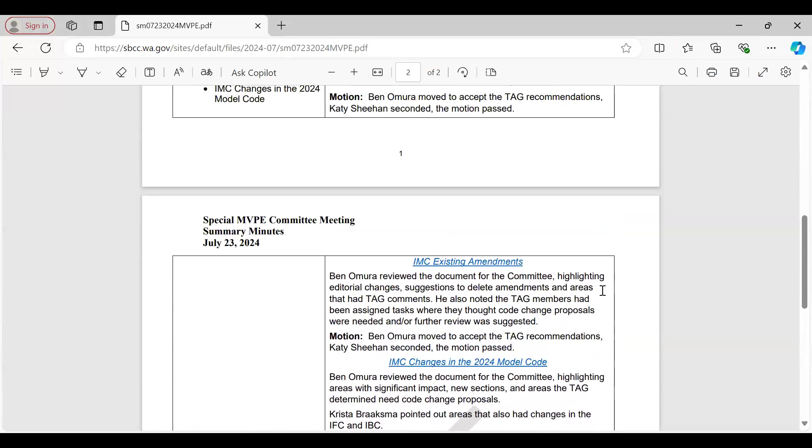Jay, I think your audio's a little bit breaking up. There we go, that might help. Okay, thank you. I'm going to try with video off and see if that helps. I will also shift to a phone connection on my audio.

Okay, is there any public comment on the minutes? Hearing none, could I get a motion to approve the 2 sets of minutes on our agenda? So moved. Second. Is there any discussion? All in favor? Aye. Aye. Aye. Any opposed? Okay, the minutes are approved.

Next on our agenda is a number of opinion requests from Bellevue, DuPont, and King County. We'll start with the mechanical code. Krista, can we start to walk through these individual changes, or individual interpretations? Thank you.

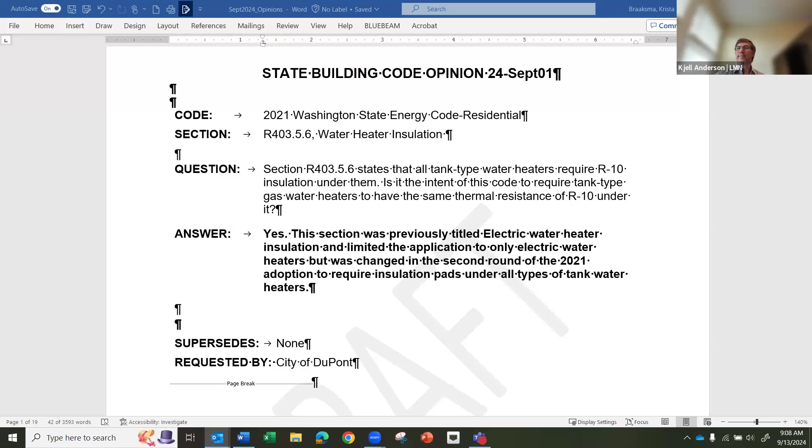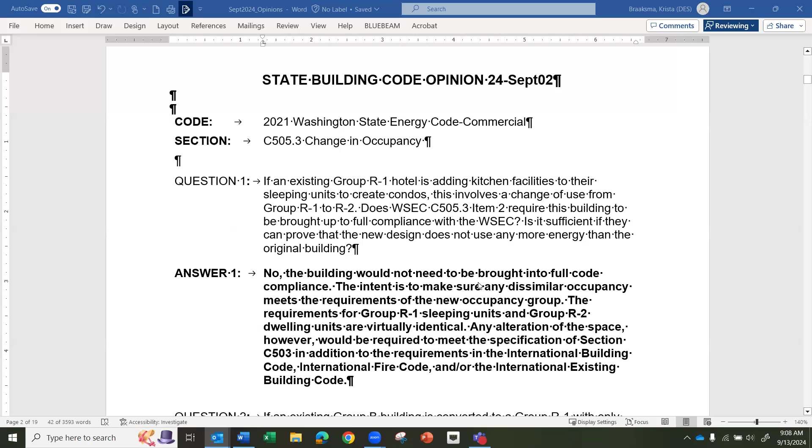Next, September 02, this is regarding changes in occupancy from the City of Bellevue. The first question is, if an existing group R1 hotel is adding kitchen facilities to their sleeping units to create condos, this involves a change of use from group R1 to R2. Does WSEC section 505.3 item 2 require this building to be brought up to full compliance with the Washington State Energy Code? Is it sufficient if they can prove that the new design does not use any more energy than the original building? The proposed answer is no, the building would not need to be brought into full code compliance.

The intent is to make sure any dissimilar occupancies meet the requirements of the new occupancy group. The requirements for group R1 sleeping units and group R2 dwelling units are virtually identical. Any alteration of the space, however, would be required to meet the specifications of section C503, in addition to the requirements in the International Building Code, International Fire Code, and/or International Existing Building Code.

The second part is, if an existing Group B building is converted to a Group R1 with only sleeping units, but no dwelling units, what are the energy code requirements? This scenario does not appear to be addressed in C505.3. The proposed answer is the conversion would fall under item 2 of section C505.3 and would be required to be brought into full compliance with the code.

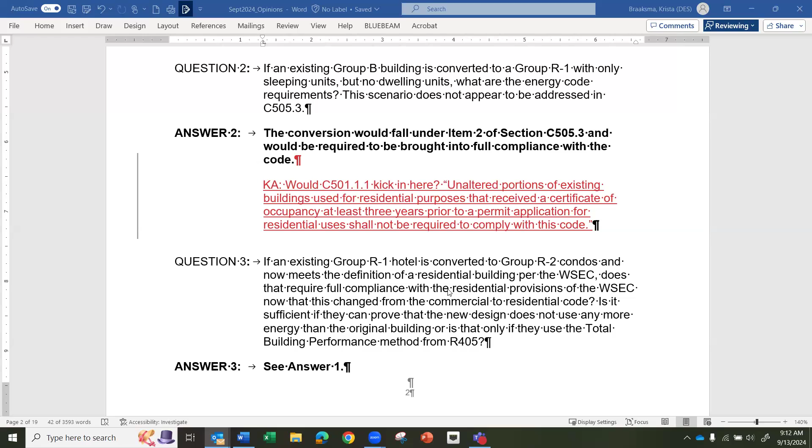Question 3: if an existing Group R1 hotel is converted to Group R2 condos and now meets the definition of a residential building per the Washington State Energy Code, does that require full compliance with the residential provisions of the Energy Code now that it's changed from commercial to residential? Is it sufficient that they can prove that the new design does not use any more energy than the original building, or is that only if they use the total building performance method from R405? And I reference back to answer 1, which says that they would not need to bring the building into full compliance.

Okay, Kjell, you had some comments. Yes, and I was trying to look it up - I thought that there was a law that passed that told us to put 501.1.1 in the code. Is that, am I remembering correctly?

You are, I remember a discussion that we had, and I will look up. I was trying to figure out, the law said a specific thing, and I thought the intent of the law was to allow conversions to Group R from something to Group R without requiring certain other things to happen. So that's why I made this comment, but I wasn't able to find the actual law that said that.

It's House Bill 1042. Okay, let's see here. And my recollection is the same as yours, that the whole purpose of this bill is conversion of commercial space to residential.

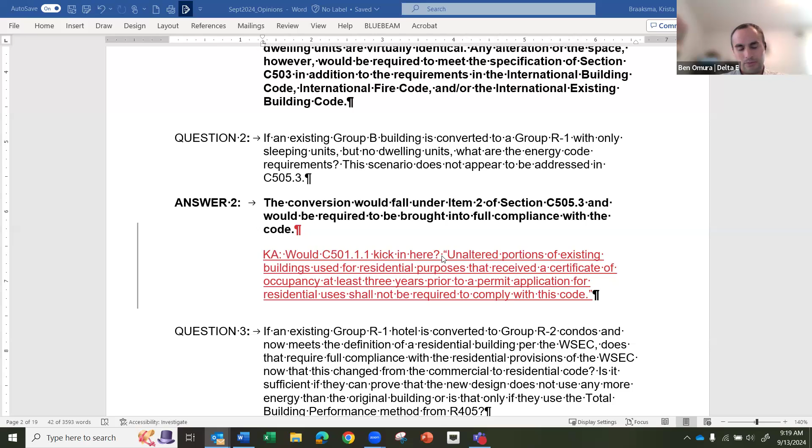And the point I was going to make is also, if we were going to reference 501.1.1, would we also need to do it in the answer to question 1 as well, since those are adding dwelling units.

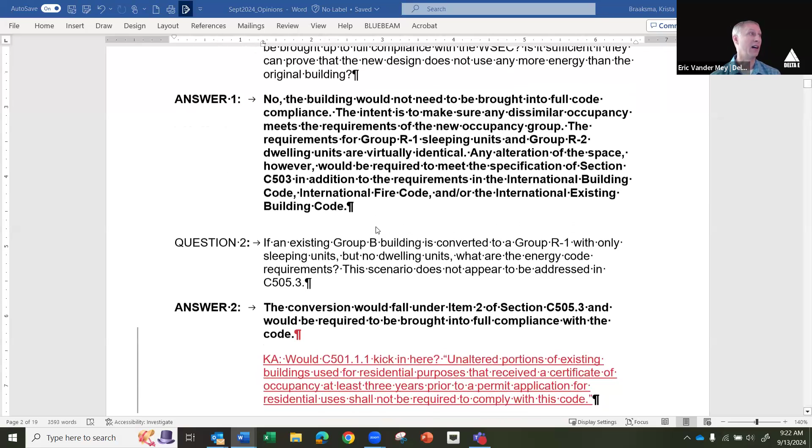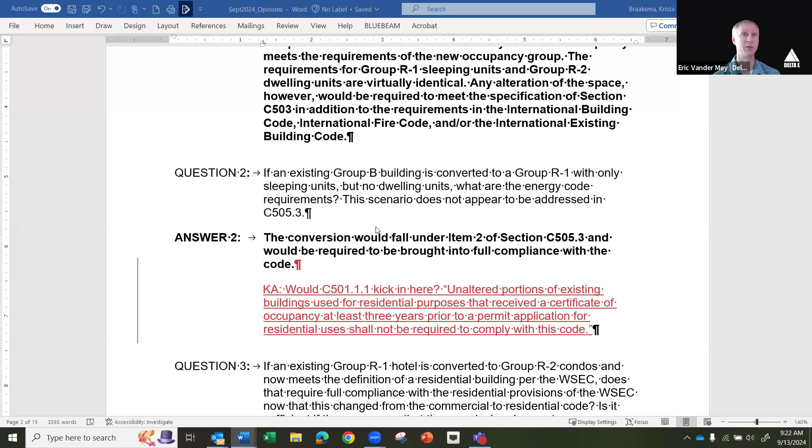And then, yeah, I agree with Ben's comment earlier that we did clarify in section 501.1.1 that the unaltered portions of existing buildings do not have to comply with that. So it's not the whole building that has to comply, it's just whatever's converted to a dwelling unit or whatnot, so it's the altered portion.

I know there's a lot of occupancies out there wanting to convert to group R2 dwelling units, and this is definitely a part of the code that needs additional work, whether it's a group B conversion or a group R sleeping-to-dwelling-unit conversion. There could definitely be language added that alternate means and methods can be approved by the code official. But we have to be careful how we answer that, and maybe very strategic about it, or we need to go into emergency rulemaking to modify the code, because we need ways to create affordable housing in the state.

To that point, Eric, I've always, whenever it says 'shall be brought into full compliance with this code,' that's always struck me as an odd thing to say, because if in one code section you're saying it's full compliance with the code, and an adjacent code section says you don't have to alter anything that is not altered, isn't that full compliance with the code?

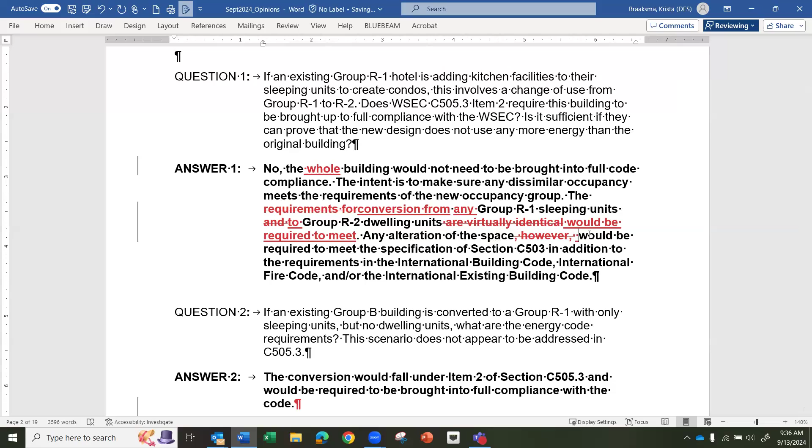Yeah, I think lobby spaces, corridors, the pool, those things are not dwelling units or sleeping units. But the exterior envelope would be. Presumably, yeah, okay.

Eric, go ahead. Just as a point of reference, I did a little code digging. It looks like up until the 2009 Washington State Energy Code, any space that was converted to any group R occupancy had to be brought into full compliance. And then in 2012, that was limited to just dwelling units. So the trigger changed in the 2012 code to be limited to conversion to group R dwelling units, just as some history.

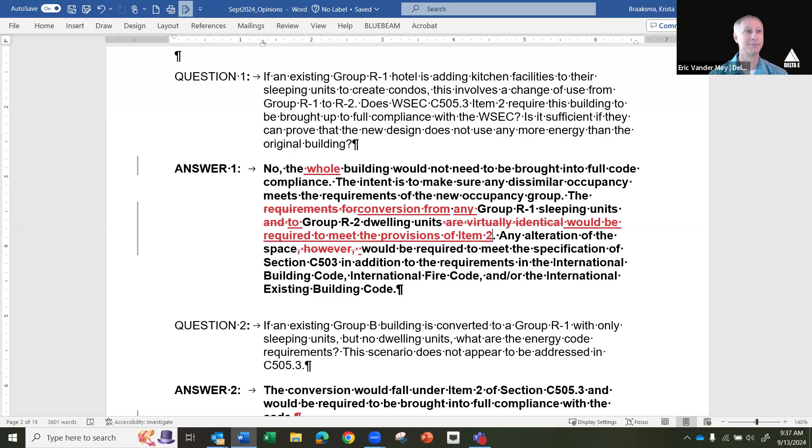Okay, given our discussion, Krista has made some potential changes to answer number 1. Does that get to clarification of what we're talking about? I think the provision of item 2 would need to be the provision of maybe C503, C505.3 item 2.

Okay, Jonathan, go ahead. The residential code provision says that any existing building, due to a change of use, must be brought into full compliance with the residential energy code. It's stated in chapter 5 of the residential energy code. I guess that's a good point, we could also add the residential energy code into the answer, because it's possible, per a previous comment, that a Woody walk-up hotel would be a Woody walk-up residential conversion. I think that's what question 3 is addressing, my understanding.

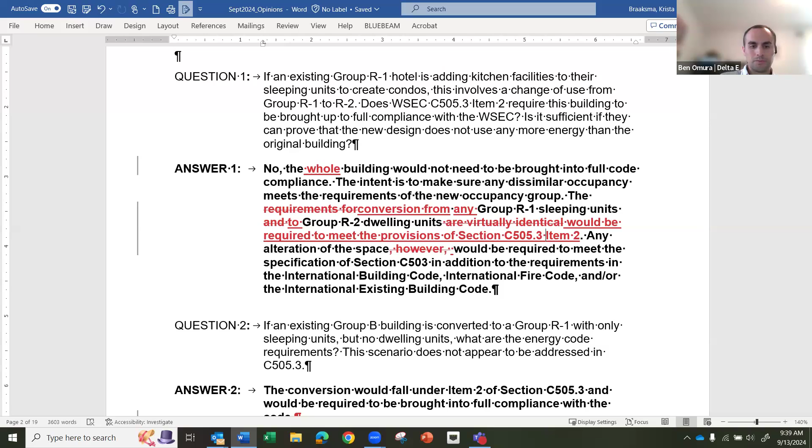Yeah, and I guess the question is specifically about group R1 hotel, which is not under the residential energy code, right. Okay, then let's break these up, question 1 and answer 1 on the hotel conversion.

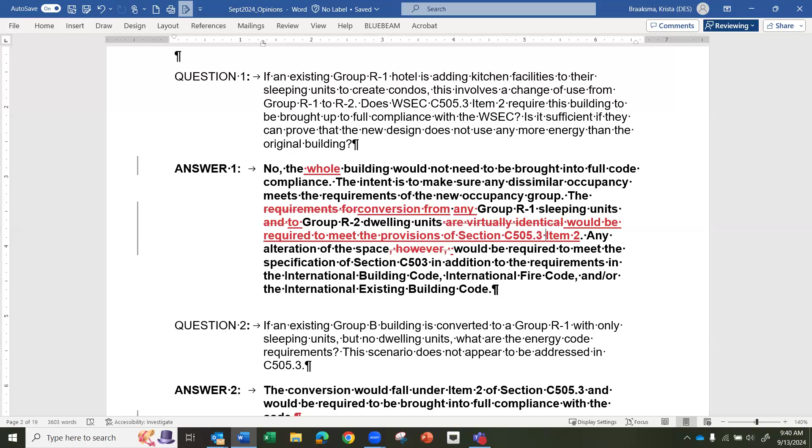Does the language shown on screen help clarify things, and are committee members comfortable with this? Nate, does this answer your submitted question? Yes, just so I clarify, it looks like you're saying that any portion of the building converted to an R2 still needs to meet the full energy requirements. And so if a portion of that dwelling unit is exterior wall, then that exterior wall would need to be upgraded. All the mechanical systems for that space would need to be upgraded. And that's what you're saying, which is pretty much in line with how we've been interpreting the code, which is fine.

Okay. Any further comment on answer and question 1? Okay, let's go down to 2 and 3, because it seems like we brought up some additional issues here.

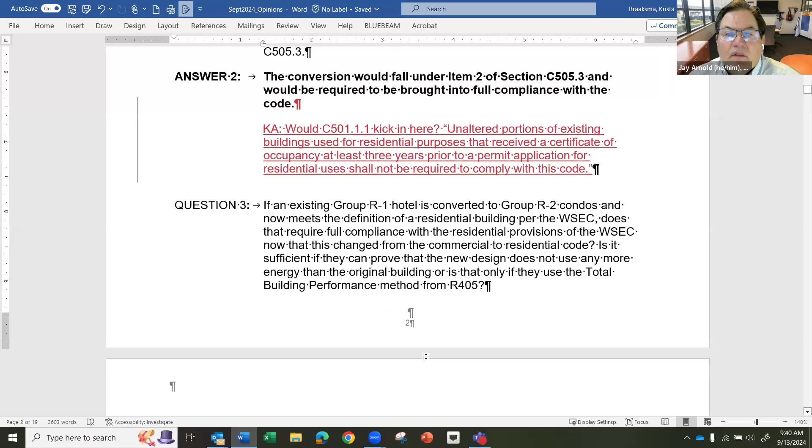For question 2, how do we want to handle the C501.1.1? I know Kjell had looked at this ahead of time. We're bringing this legislation in kind of at the last minute. Are folks comfortable with putting together an answer here, or do you need more information?

So I guess my question is, this seems to be a mistaken oversight in the code because it only talks about group R2 dwelling units. So the response says it falls under item 2, but item 2 doesn't say anything about sleeping units. So if I convert anything to a sleeping unit, I would say the code says item 2 does not apply to sleeping units, only dwelling units. So converting to a hotel appears to not be covered, which maybe that's just a clarification, but that's what the code, I think, actually says.

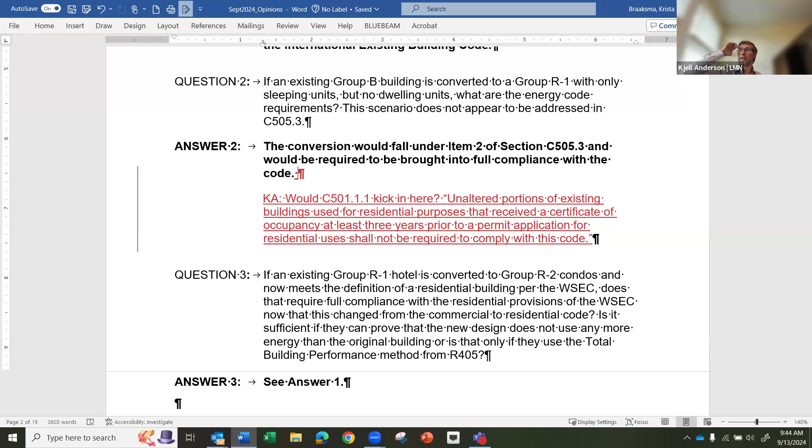The answer would be no. The conversion would not fall under item 2 of section C505.3. Other code requirements might apply, but it would not require full compliance.

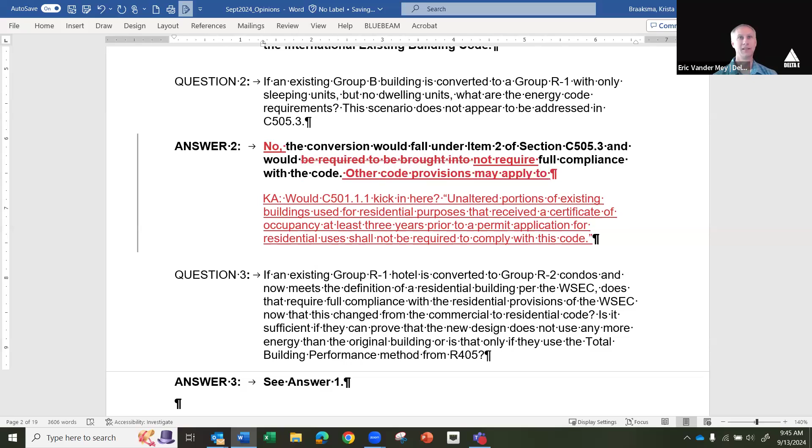One thing I'd like to... Go ahead, Eric and Kjell, didn't mean to cut you off. Yeah, any systems that are added would, yeah. Okay.

As we're discussing here, a change of opinion compared to the first answer where we clarified it, I would like staff to weigh in on how they got to the original answer before we're looking at changing the answer. Krista, do you have any comment?

Well, I was kind of going back to the intent of the original code before we mashed it in with the IECC, and when it was just talking about conversion to group R occupancy and not specifying group R1 versus R2. So I was basically going off of more historical precedents than how the code reads now. Thank you.

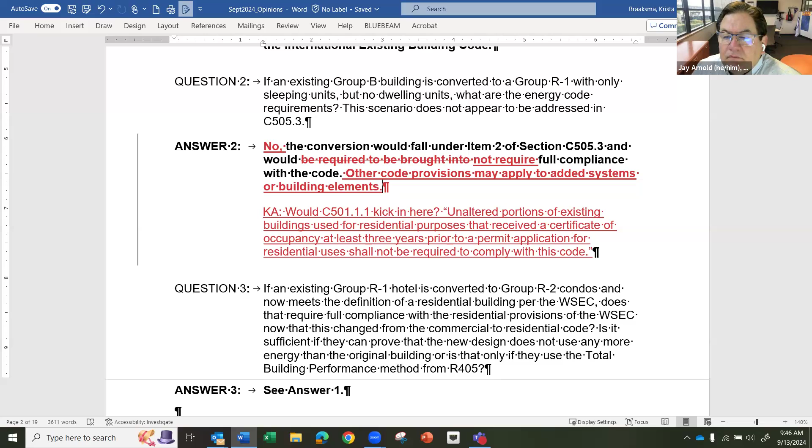Is there any comment on the draft that is on screen? I think my one comment is that I get how the code reads, but my whole point is it seems very weird to regulate a hotel to a condo more restrictively than you regulate an office to a hotel. So I guess that's maybe future code thought, but the way it was previously written seemed to go back to the assumption before 2012, as Eric sent in, when it seemed to be more clear, and the addition of dwelling units, in my opinion, confuses this. This is clear, but again, it doesn't actually seem to make sense.

We'll be accepting proposals for the next commercial code cycle in a few months. So if I could summarize your comments, Nate, you're saying this interpretation is clear from a policy point, but we might have some work to do in the future. I agree. Okay, got it.

Is there any further public comments or further comments on question 2 and answer 2? Okay, let's look at question 3.

The staff draft opinion says it's covered in our answer previously. Is everybody comfortable with that?

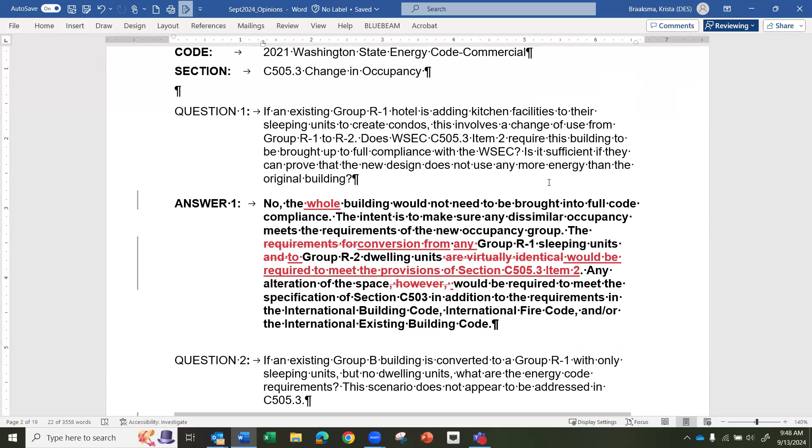You've changed the answer to question 1 to be the more restrictive literal code reading, which means if you reference question 1, I think it's the same thing, like the residential code says full compliance is required. So if that's the stance we're taking, then I think answer 1 is fine for me, but I could see it needing to be clarified and put in some note that full compliance would be required per the residential code.

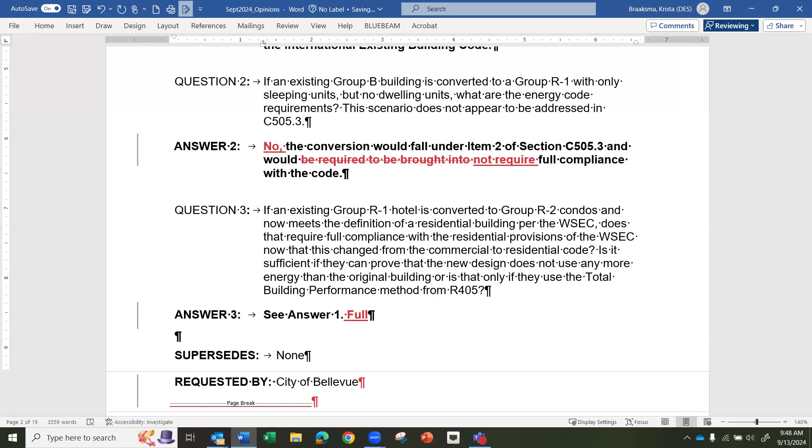Thank you. Ben, go ahead. Yeah, I think it would be helpful to clarify in the answer to reference the relevant residential energy code section, as Jonathan mentioned, as well as potentially clarifying that the assumption for this condition is that the building itself would fall under a residential classification.

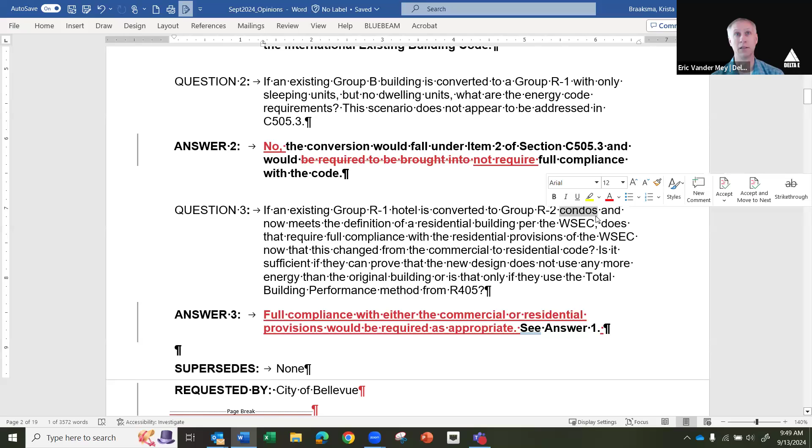Eric, go ahead. Yes, I just want to comment that condo is not a building code term at all. There are no triggers in the building code or energy code for condo, so it may be helpful to clarify the question that the conversion is to a group R2 dwelling unit, just to be consistent with code language, if that was the intent of the question. I'm fine with that modification to my question.

And then, potentially we could have a conversion of a building that was built under the commercial energy code that has exterior entrances and is a low-rise residential building, and then now could comply under the residential sections of the energy code. If it was 3 stories or less with exterior entrance building, it would be going from being a commercial hotel as originally constructed to being under the residential energy code, which would just be a really strange transition. So I don't know if we need to comment on that at all.

This came up because we have this exact situation right now. It's under review for this 3-story hotel that's becoming a residential energy code building.

So that's part of the question: can they show compliance under R405, or do they have to show compliance under which code are you starting to and then going to — that's an interesting question.

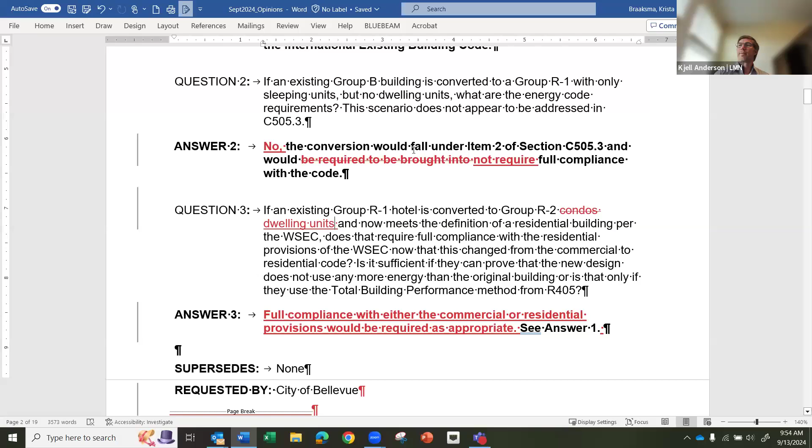Just when we bring a draft for the full council. Okay. Then could I get a motion that we refer this opinion as revised to the full council for approval?

So moved. Second. Okay, it's moved by Justin, seconded by Cho. Any discussion? All in favor, signify by saying aye. Any opposed? The motion passes, and we'll add this to the agenda for our meeting next week.

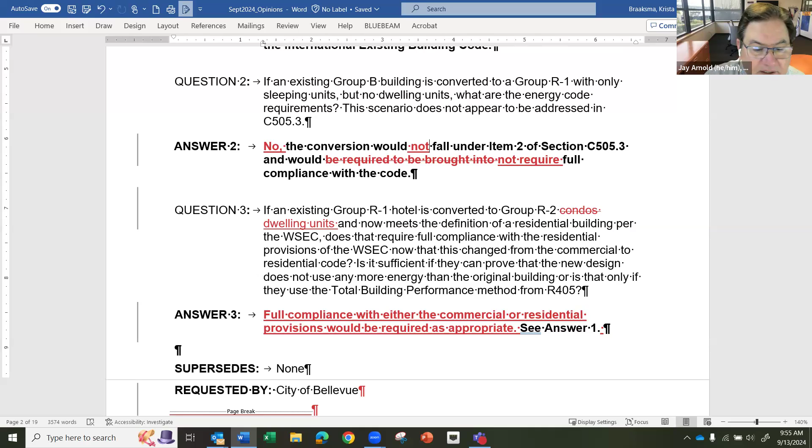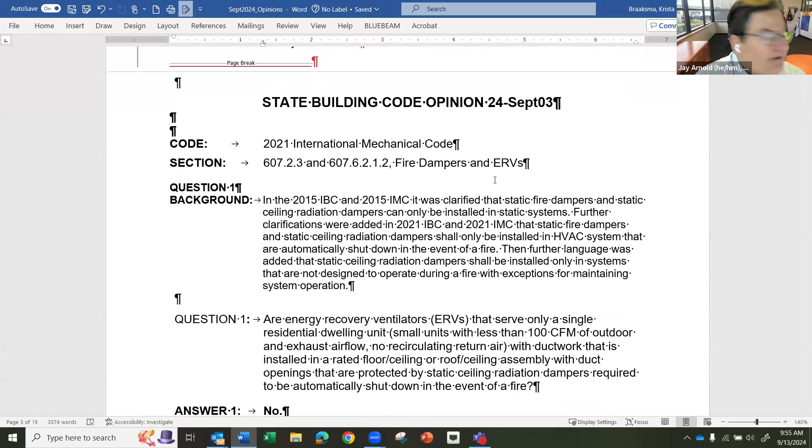Thank you for the discussion, and Nate and others, thank you for jumping in — I'm not seeing raise hand in my Zoom either, so I appreciate the discussion. Next opinion.

Okay, moving on to 03, on the International Mechanical Code. There's background for both of the two individual questions here. In the 2015 IBC and 2015 IMC, it was clarified that static fire dampers and static ceiling radiation dampers can only be installed in static systems.

Further clarifications were added in the 2021 IBC and IMC that static fire dampers and static ceiling radiation dampers shall only be installed in HVAC systems that are automatically shut down in the event of a fire. Further language was added that static ceiling radiation dampers shall be installed only in systems that are not designed to operate during a fire, with exceptions for maintaining system operations.

Are energy recovery ventilators that serve only a single residential dwelling unit, less than 100 CFM of outdoor and exhaust airflow with no recirculating return air, with ductwork installed in a rated floor ceiling assembly or roof ceiling assembly with duct openings protected by static ceiling radiation dampers required to be automatically shut down in the event of a fire — the draft answer is no, with no supporting information.

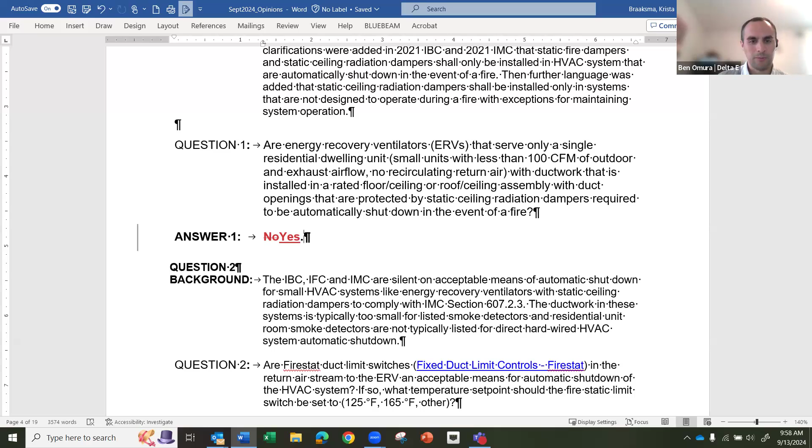Yeah, Ben, and I can find that language. It's either in 90 or 101 of the International Fire Code. So I will see if I can come up with that and get that to Krista.

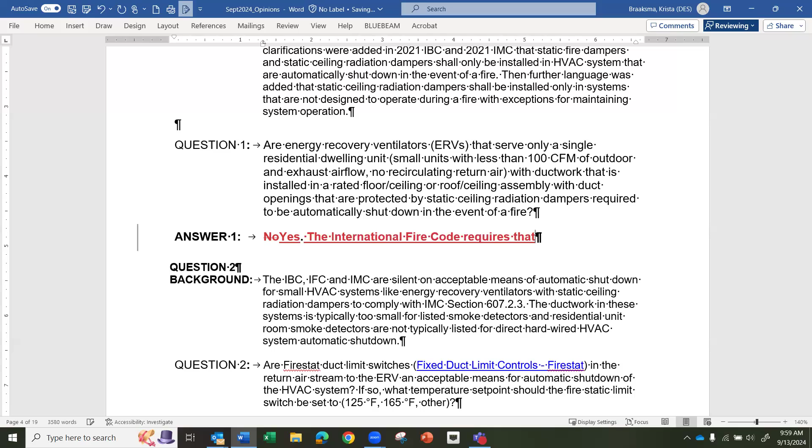Okay, and then for this, would we get the details in time for the meeting next week, if possible? Justin, is that something you can assist with? Yeah, absolutely. I'm actually going to be doing fire damper training with fire marshals on Tuesday and Wednesday, and I'll probably be speaking about the exact code, so I won't have any problem finding it. I'll email the code over to Krista probably Monday or Tuesday.

And any comment on question 2 and answer 2? Eric, go ahead. Yeah, so I guess if the International Fire Code does specifically address the shutdown requirements, then we might need to modify question 2 or modify the answer to it. I haven't found a reference yet in the fire code that specifically addresses these types of systems.

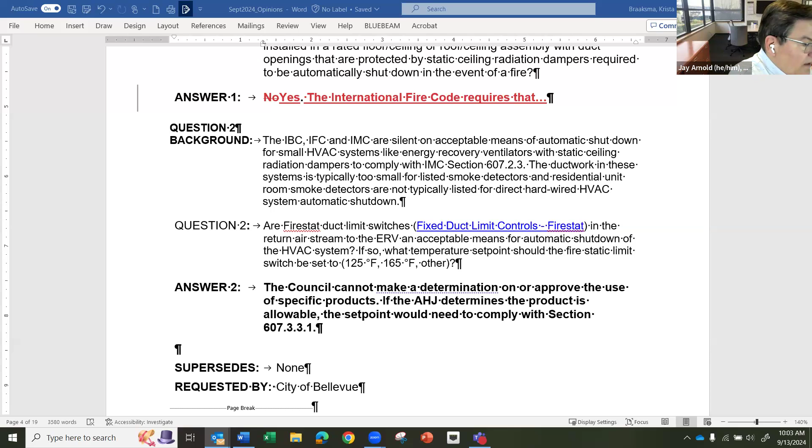Any discussion? All in favor, signify by saying aye. Aye. Aye. Any opposed? Okay, motion passes. Next.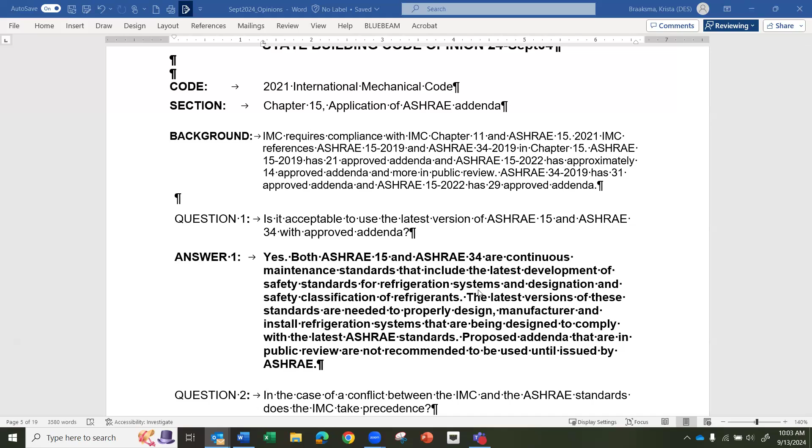Okay. The next concerns the mechanical code and how you apply standards that typically come out after the code is published. And the question is: is it acceptable to use the latest version of ASHRAE 15 and ASHRAE 34 with approved addenda?

The proposed answer is yes. Both ASHRAE 15 and ASHRAE 34 are continuous maintenance standards that include the latest development of safety standards for refrigeration systems and designation and safety classifications of refrigerants. The latest versions of these standards are needed to properly design, manufacture, and install refrigeration systems that are being designed to comply with the latest ASHRAE standards. Proposed addenda that are in public review are not recommended to be used until issued by ASHRAE.

Dan, go ahead. Yeah, and maybe before we get into discussion for this particular item, I know that Eric had developed a lot of these questions that he worked with Laura at City of Bellevue to submit. I don't know how much the committee members or other people on the call would like a more broad overview of the situation - in the design and construction community right now we're facing an increasing amount of uncertainty and confusion on what the requirements are for some of these refrigerants and equipment using different types of refrigerants, new types we haven't typically used in buildings previously. So that's where I think the next couple of questions and interpretation requests are based around. They've been separated out, but I don't know if there's maybe a general desire for a broader overview at this point - just kind of offer that out there.

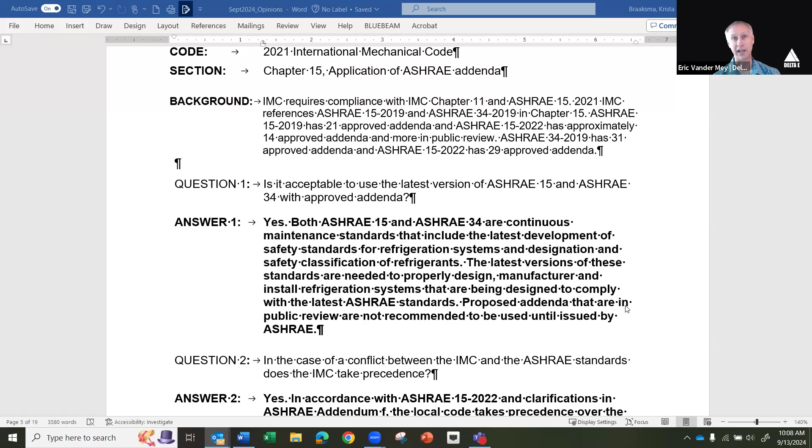So I can get into some of the details later on. We do have some diagrams that we developed as we get into some of the other interpretations, if folks like to look at pictures. We shared those with the city of Bellevue, so as we get into some of these specific questions and interpretations, we do have some diagrams that we can show the committee if needed. Thanks.

Great, thank you for the background. Okay, for this particular question, the answer would take the updated current adopted standards, and if there's a conflict, local code takes precedence. Is there any comment on this particular opinion?

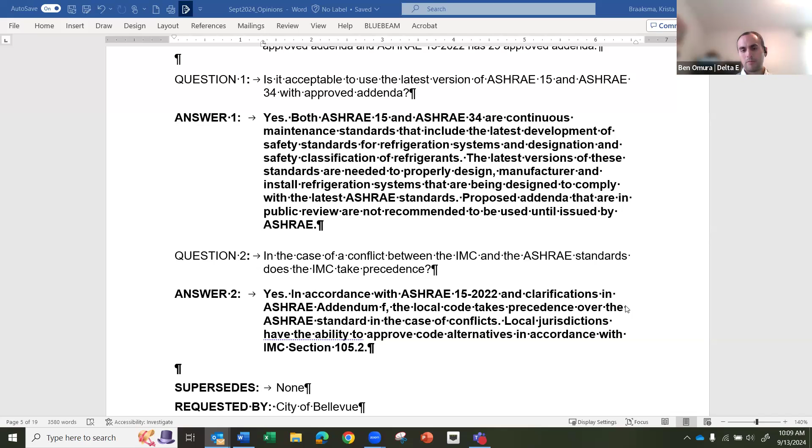Could I get a motion to approve this opinion as shown? So moved. Second. It's been properly moved and seconded. All in favor of approving this opinion? Aye. Aye. Okay, this opinion is approved. Let's move on to the next one as we get into the fun details.

Okay, September 04B. This is application of standards for residential buildings. If equipment and appliances are listed and labeled in accordance with a later version of a standard that is acceptable. This is missing part of the question.

Is that acceptable? No, it is there. Okay, for example, if they are listed and labeled under UL 60335-2-40-2022 edition 4 in lieu of 60335-2-40-2017 edition 3, and the proposed answer is yes.

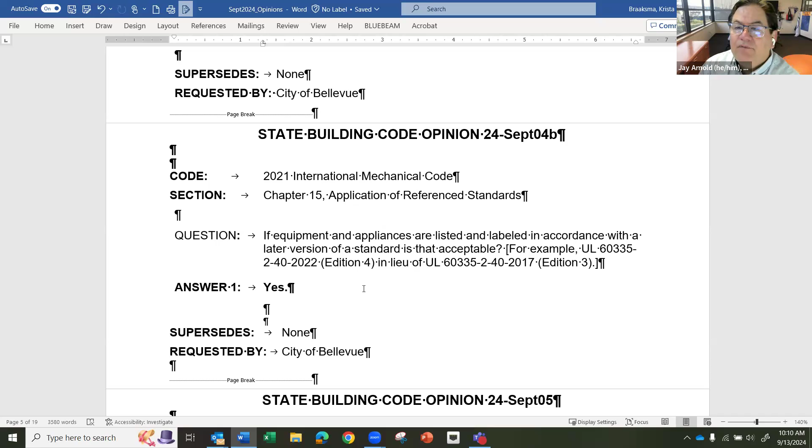Any comments on this? Could I get a motion to approve this opinion? So moved. Second. Okay, it's been properly moved and seconded. Is there any discussion? All in favor? Aye. Aye. Aye.

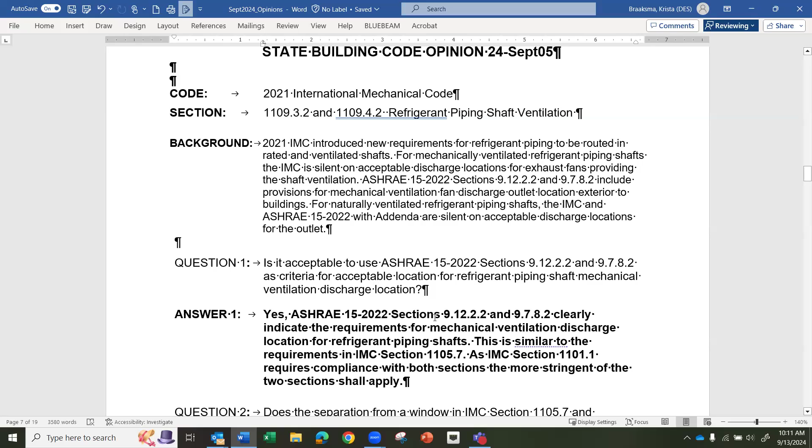Okay, September 05. Also on the mechanical code, refrigerant piping shaft ventilation. The 2021 IMC introduced new requirements for refrigerant piping to be routed in rated and ventilated shafts. For mechanically ventilated refrigerant piping shafts, the IMC is silent on acceptable discharge locations. ASHRAE 15 includes provisions for mechanical ventilation fan discharge outlet location exterior to buildings.

For naturally ventilated refrigerant piping shafts, the IMC and ASHRAE 15 with addenda are silent on acceptable discharge locations. Question 1: is it acceptable to use ASHRAE 15 2022 sections 9.12.2.2 and 9.7.8.2 as criteria for acceptable location for refrigerant piping shaft mechanical ventilation discharge location? Answer: yes. ASHRAE 15 clearly indicates the requirements for mechanical ventilation discharge location for refrigerant piping shafts. This is similar to the requirements in IMC section 1105.7, as IMC section 1101.1 requires compliance with both sections. The more stringent of the two shall apply.

Go ahead, and I agree with the proposed answer here. Just to point out that currently with the 2021 IMC and Washington State Mechanical Code, ASHRAE 15-2019 is being referenced. A lot of these requirements are clarified in the 2022 edition of the ASHRAE standard, which is being referenced here, and we previously addressed this in one of the previous interpretation requests. So I want to make sure the edition of ASHRAE is really important here, where a lot of this has been clarified for design and installation requirements.

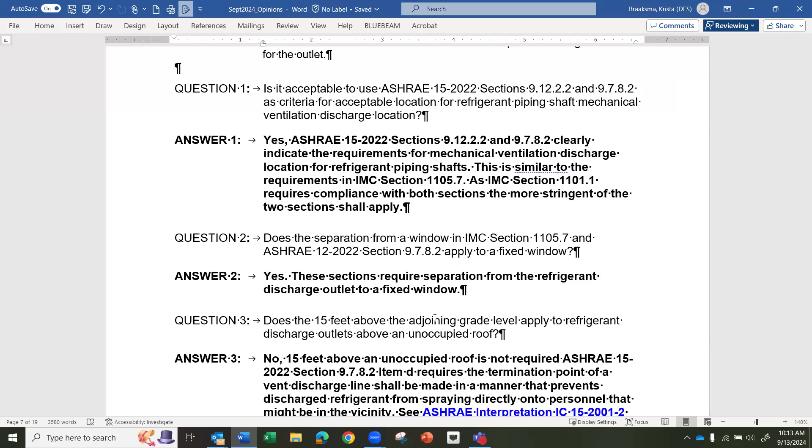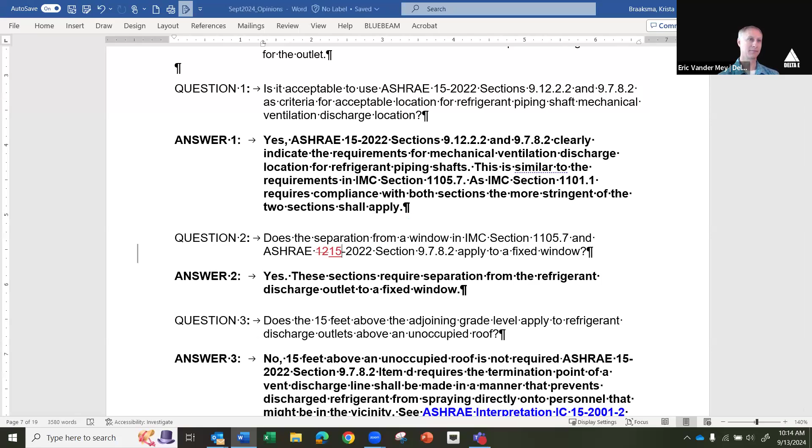I think the question needs to change - I don't think it's supposed to be ASHRAE 12, I think it's supposed to be 15. Correct, that's what I was going to say. Any other comments on that with that revision?

Question 3: Does the 15 feet above the adjoining grade level apply to refrigerant discharge outlets above an unoccupied roof? The proposed answer: no. 15 feet above an unoccupied roof is not required. ASHRAE 15-2022 section 9.7.8.2 item D requires the termination point of a vent discharge line shall be made in a manner that prevents discharged refrigerant from spraying directly onto personnel that might be there. See ASHRAE interpretation IC 15-2001-2 for further information, and I can bring that up if you'd like to see the interpretation.

Let's see if there's any comments on this. Seeing none, I think we can just go ahead.

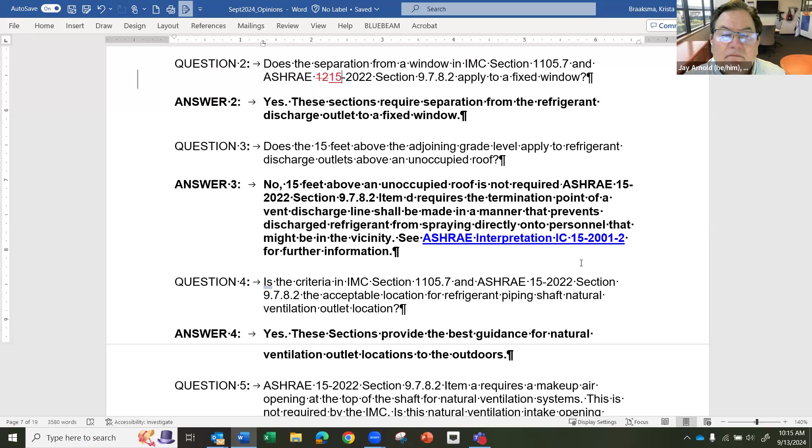Question 4: is the criteria in IMC section 1105.7 and ASHRAE 15-2022 section 9.7.8.2 the acceptable location for refrigerant piping shaft natural ventilation outlet location? The proposed answer: yes, these sections provide the best guidance for natural ventilation outlet locations to the outdoor.

Any comments on this answer?

Question 5: ASHRAE 15-2022, section 9.7.8.2, item A, requires a makeup air opening at the top of the shaft for natural ventilation systems. This is not required by the IMC. Is this natural ventilation intake opening required? The answer: yes, a makeup air opening is required at the top of naturally ventilated shafts in accordance with ASHRAE 15-2022. Any comments on this?

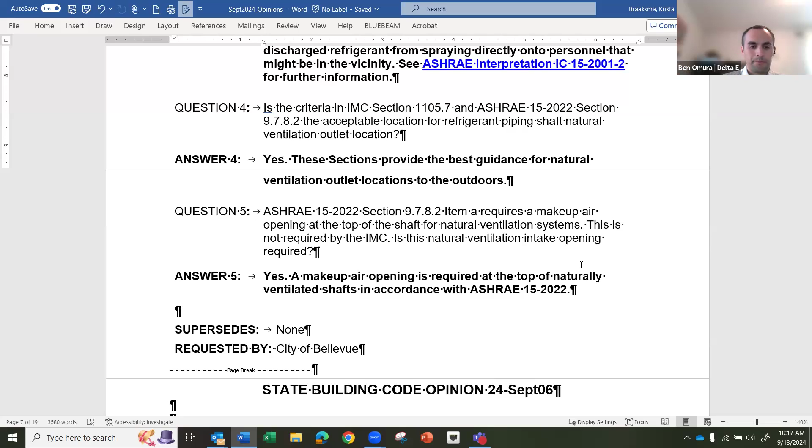Okay, looking at this entire opinion with that one housekeeping change, is there any comments on approving this opinion as revised? Could I get a motion? So moved. Second. It's been properly moved and seconded. Any discussion? All in favor? Aye, aye. The motion is approved. Next opinion.

Moving on to September 06, also on the mechanical code, this time we're looking at shaft construction. The 2021 IMC and ASHRAE 15 do not specify acceptable means of construction for the interior surface of a rated shaft for refrigerant piping that is conveying outdoor air. Is it acceptable to construct the rated vented shaft interior that is conveying outdoor air with non-metallic duct construction such as fire-rated reinforced fiberglass wall panel, shaft liner, or similar materials? Proposed answer is yes. There's no specific requirement in the 2021 IMC Chapter 11, IBC Section 713, or ASHRAE 15 that requires a metallic surface to convey the outdoor air in a refrigerant piping rated shaft that requires venting.

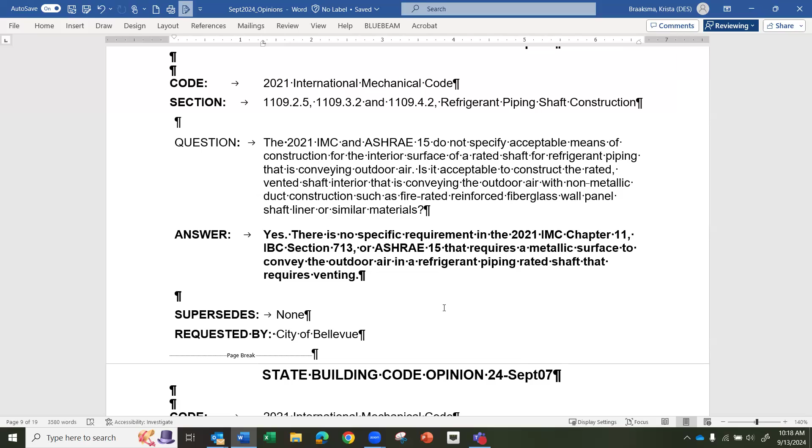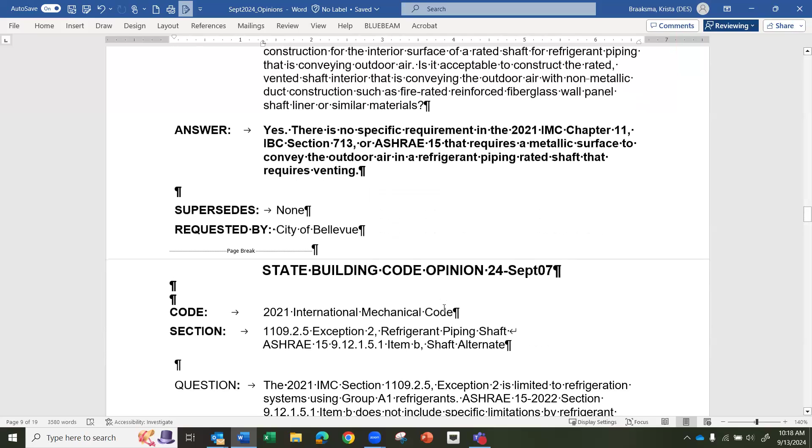Any comments on this? I get a motion to approve. So moved. Second. So properly moved and seconded. Is there any discussion? All in favor of approving this opinion? Aye, aye, aye. The motion is approved. Next.

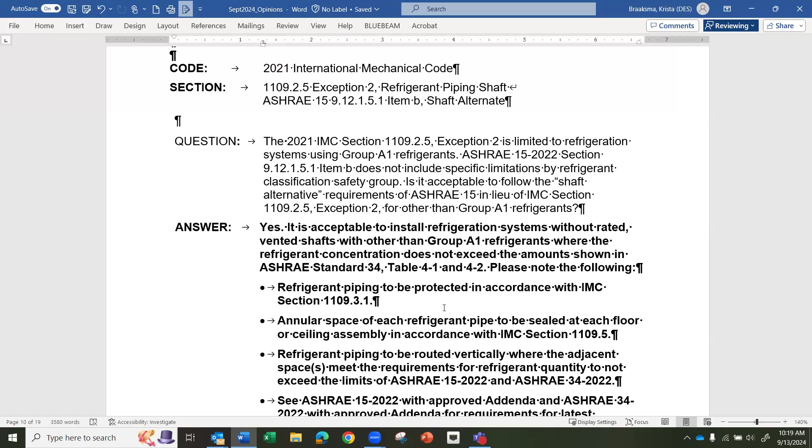Moving on to September 07 on the mechanical code. The 2021 IMC section 1109.2.5 exception 2 is limited to refrigeration systems using group A1 refrigerants. ASHRAE 15-2022 section 9.12.1.5.1 item B does not include specific limitations by refrigerant classification safety group. Is it acceptable to follow the shaft alternative requirements of ASHRAE 15 in lieu of IMC section 1109.2.5 exception 2 for other than group A1 refrigerants? The proposed answer is yes, it is acceptable to install refrigeration systems without rated vented shafts with other than group A1 refrigerants where the refrigerant concentration does not exceed the amounts shown in ASHRAE Standard 34, Table 4-1 and 4-2.

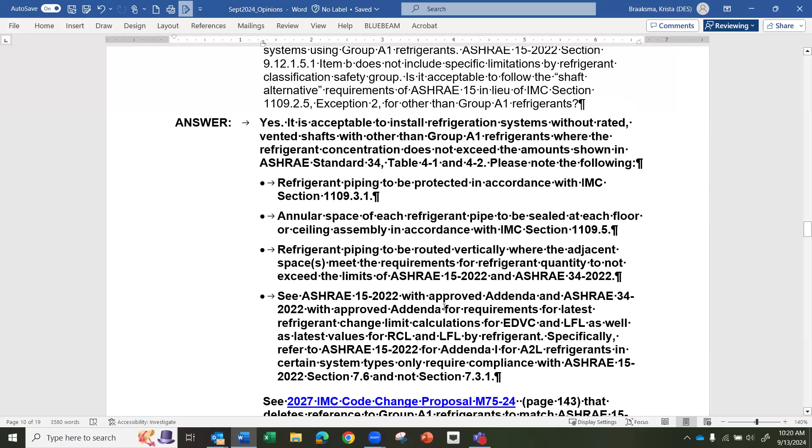Please note the following: refrigerant piping to be protected in accordance with IMC section 1109.3.1. Annular space of each refrigerant pipe to be sealed at each floor or ceiling assembly in accordance with IMC section 1109.5. Refrigerant piping to be routed vertically where the adjacent space meets the requirements for refrigerant quantity to not exceed the limits of ASHRAE 15-2022 and ASHRAE 34-2022. See ASHRAE 15-2022 with approved addenda and ASHRAE 34-2022 with approved addenda for requirements for latest refrigerant change limit calculations for EDVC and LFL, as well as the latest values for RCL and LFL by refrigerant. Specifically refer to ASHRAE 15-2022 addenda L for A2L refrigerants - in certain system types only require compliance with ASHRAE 15-2022 section 7.6 and not section 7.3.1.

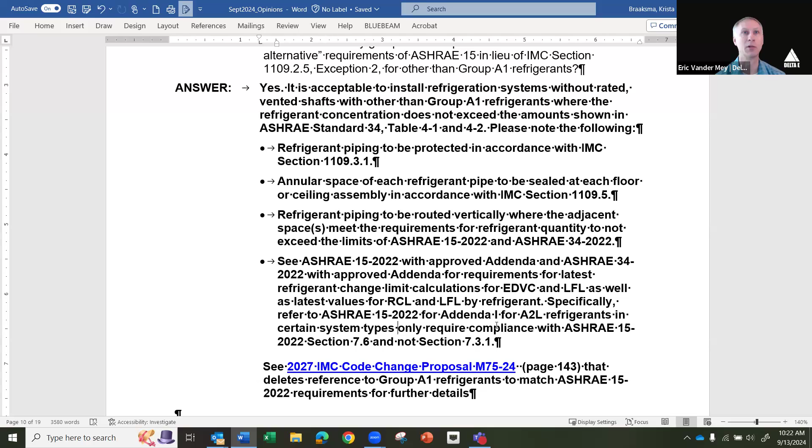Yeah, so just some background here. There are some differences between how the IMC was published and how ASHRAE 15 has evolved that are pretty substantial. For these small systems like mini split heat pumps, where we have very small refrigerant charges, there have been clarifications, and these clarifications did not get into the 2024 IMC, which has been published. There are 2027 IMC code proposals, as referenced at the bottom here, that are going to help align the code. Those code proposals are just code change proposals. They have not yet been passed, but we're really leaning on the ASHRAE 15 language here that allows a little bit more flexibility to cost effectively install these heat pump systems in our buildings. There is one editorial change, Krista, needs to happen in that last bullet point. It should say refrigerant charge limits, not change limits. So I wanted to get that word corrected there.

So yeah, if folks have questions on this, again, I do have diagrams of what this looks like. This essentially avoids the rated vented shaft and allows you to run piping vertically in the building where it's fire caulked at each floor, and you don't have to have that rated vented shaft if the refrigerant charge is very small and within the limitations.

Okay, are there any questions or comments? Could I get a motion to approve this opinion and answer? So moved. Okay, it's been properly moved and seconded. All in favor of approving this opinion? Aye. Aye. Aye. Okay, this opinion is approved as with that housekeeping change.

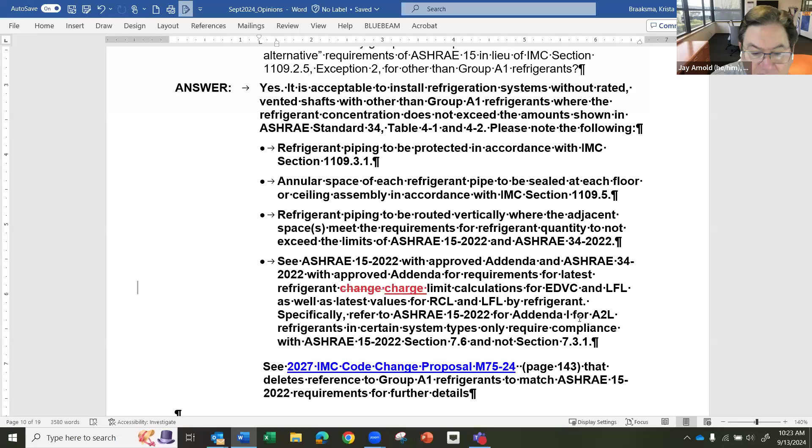Also in the mechanical code, section 1109.2.5, exception 3, for exterior refrigerant piping enclosure venting. The 2021 IMC does not require a rated vent shaft for refrigerant piping located on the exterior of the building where vented to the outdoors. Are there specific requirements in the IMC or ASHRAE 15 on minimum free area and acceptable location on the building exterior, distance from windows, operable openings, ventilation openings, exits, etc., for the vented openings in the exterior refrigerant piping enclosures? No, there is no specific guidance in the 2021 IMC or ASHRAE 15 2022 on vent opening minimum free area, distribution, or locations for exterior refrigerant piping enclosures.

Okay, any questions or comments on this opinion? Okay, can I get a motion? I'll make a motion that the committee recommends publishing the opinion as written here. Okay, is there a second? Second. Okay, so the motion is to approve and publish the opinion as written. Any discussion? All in favor? Aye. Aye. Aye. Aye. Okay, the motion is approved.

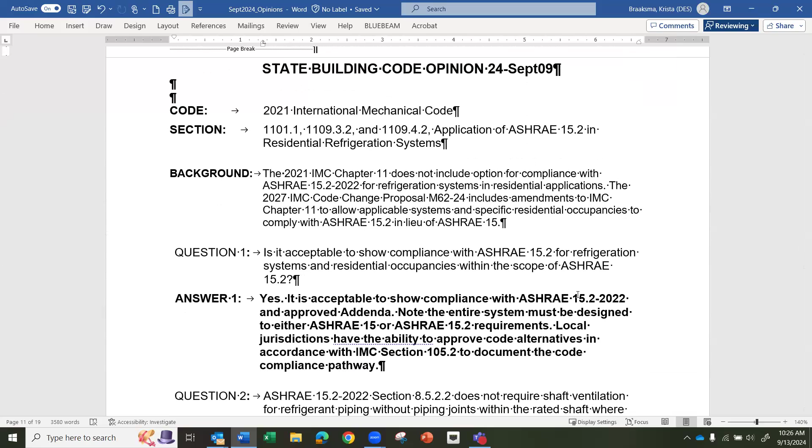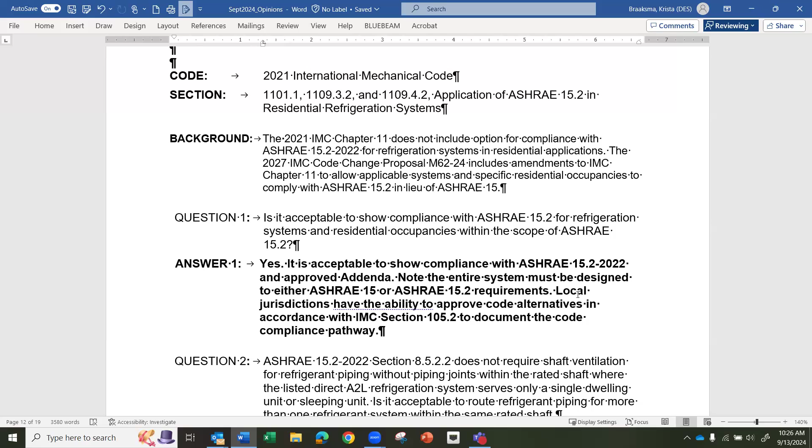Application of ASHRAE 15.2 in residential refrigeration systems. The 2021 IMC chapter 11 does not include an option for compliance with ASHRAE 15.2 2022 for refrigeration systems in residential applications. The 2027 IMC code change proposal M62-24 includes amendments to IMC chapter 11 to allow applicable systems and specific residential occupancies to comply with ASHRAE 15.2 in lieu of ASHRAE 15. Question 1: is it acceptable to show compliance with ASHRAE 15.2 for refrigeration systems and residential occupancies within the scope of ASHRAE 15.2? Proposed answer: yes, it is acceptable to show compliance with ASHRAE 15.2 2022 and approved addenda. Note the entire system must be designed to either ASHRAE 15 or ASHRAE 15.2 requirements. Local jurisdictions have the ability to approve code alternatives in accordance with IMC section 105.2 to document the code compliance pathway.

Okay, any questions or comments on this? Eric, go ahead.

Yeah, just reiterating the background information here. This is a standard that is new and didn't exist when we passed the 2021 code. It is the latest standard of how to deal with these refrigerants in residential occupancies, including multifamily residential dwelling units. And again, it provides more flexibility. There are 2027 IMC code change proposals also on this one that we could reference, I guess. So there is proposed language to put this into the 2027 IMC, but it did not get into the 2024 IMC. Thanks.

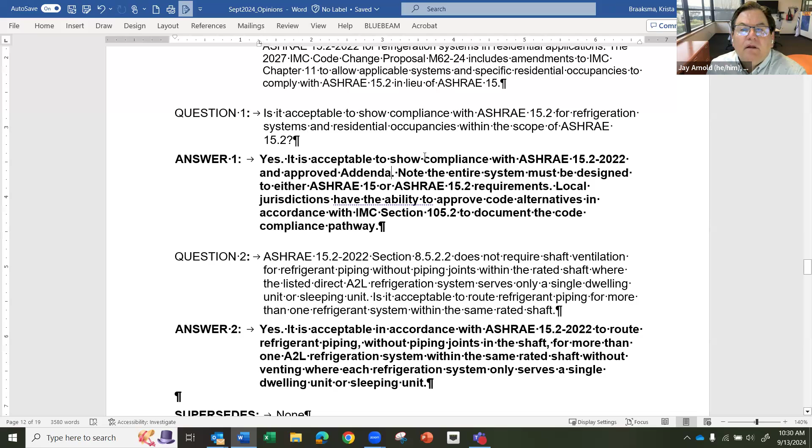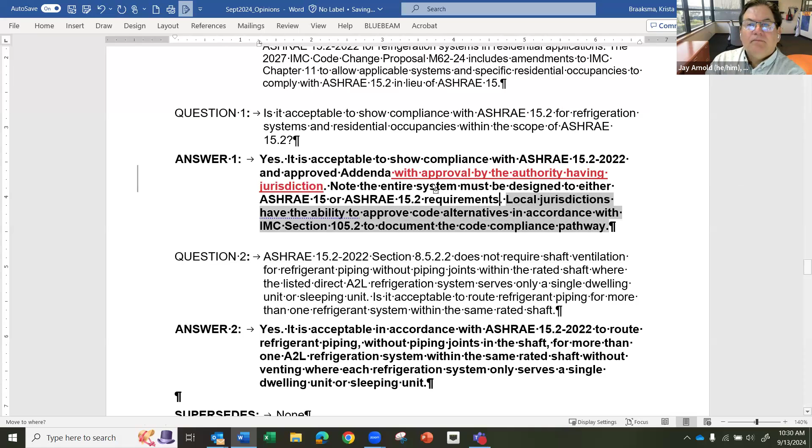Okay, question 2. ASHRAE 15.2 2022, section 8.5.2.2 does not require shaft ventilation for refrigerant piping without piping joints within the rated shaft where the listed direct A2L refrigeration system serves only a single dwelling unit or sleeping unit. Is it acceptable to route refrigerant piping for more than one refrigerant system within the same rated shaft?

Proposed answer, yes, it is acceptable in accordance with ASHRAE 15.2 2022 to route refrigerant piping without piping joints in the shaft for more than one A2L refrigeration system within the same rated shaft without venting, where each refrigeration system only serves a single dwelling unit or sleeping unit. Any questions or comments on this question and answer?

I was going to suggest what I think Krista's writing in right now. So thank you. Okay. Seeing no discussion, I'd like to entertain a motion to approve this opinion with the revisions on screen.

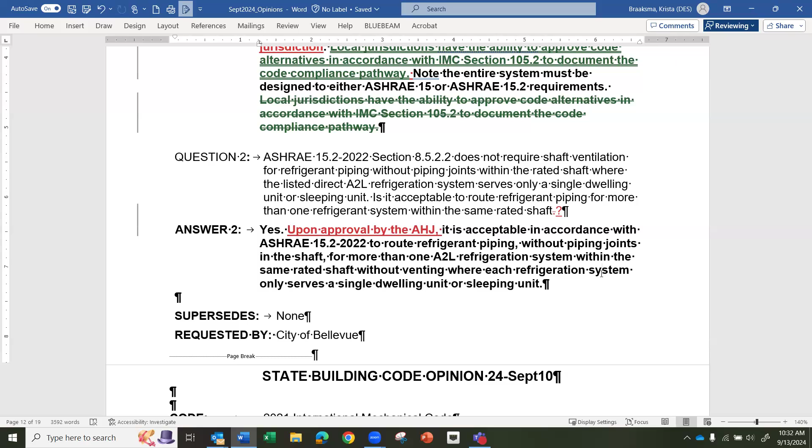So moved. Second. Okay, it's been properly moved and seconded. Any discussion? All in favor? Aye. Aye. Aye. Okay, the opinion is approved as revised.

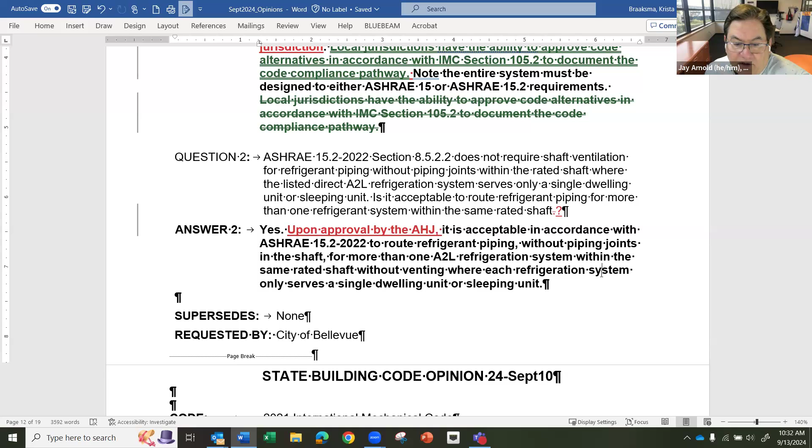Okay, let's go to September 10. Still in the mechanical code. We're now looking at ASHRAE 15, 2022, section 7.5.1.2, refrigeration systems in public corridors and lobbies. IMC Chapter 11 does not include restrictions for refrigerants in a public corridor or lobby.

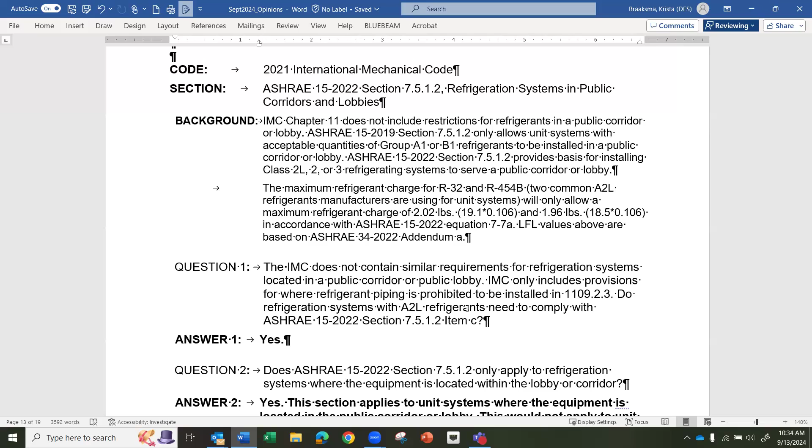ASHRAE 15, 2019, section 7.5.1.2 only allows unit systems with acceptable quantities of group A1 or B1 refrigerants to be installed in a public corridor or lobby. ASHRAE 15, 2022, section 7.5.1.2 provides basis for installing class 2L, 2 or 3 refrigerating systems to serve a public corridor or lobby. The maximum refrigerant charge for R32 and R454B, two common A2L refrigerant manufacturers are using for unit systems, will only allow a maximum refrigerant charge of 2.02 pounds and 1.96 pounds in accordance with ASHRAE 15, 2022, equation 7-7A. LFL values above are based on ASHRAE 34, 2022, Addendum A.

Question 1, the IMC does not contain similar requirements for refrigeration systems located in a public corridor or public lobby. IMC only includes provisions for where refrigerant piping is prohibited to be installed in 1109.2.3. Do refrigeration systems with A2L refrigerants need to comply with ASHRAE 15, 2022, section 7.5.1.2, item C? The proposed answer is yes.

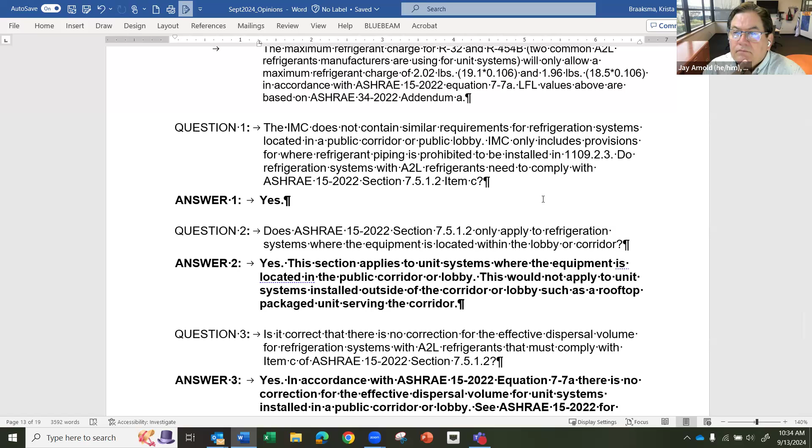Okay, any comments on this? Let's keep going. Question 2, does ASHRAE 15, 2022, section 7.5.1.2 only apply to refrigeration systems where the equipment is located within the lobby or corridor? Proposed answer, yes. This section applies to unit systems where the equipment is located in the public corridor or lobby. This would not apply to unit systems installed outside of the corridor or lobby, such as a rooftop package unit serving the corridor.

Any questions or comments on this? Question 3. Is it correct that there is no correction for the effective dispersal volume for refrigeration systems with A2L refrigerants that must comply with item C of ASHRAE 15/2022, section 7.5.1.2? Proposed answer, yes. In accordance with ASHRAE 15/2022, equation 7-7A, there is no correction for the effective dispersal volume for unit systems installed in a public corridor or lobby. See ASHRAE 15/2022 for definitions of refrigeration system, unit system, self-contained system, lobby, and waiting room. Any questions or comments on question 3?

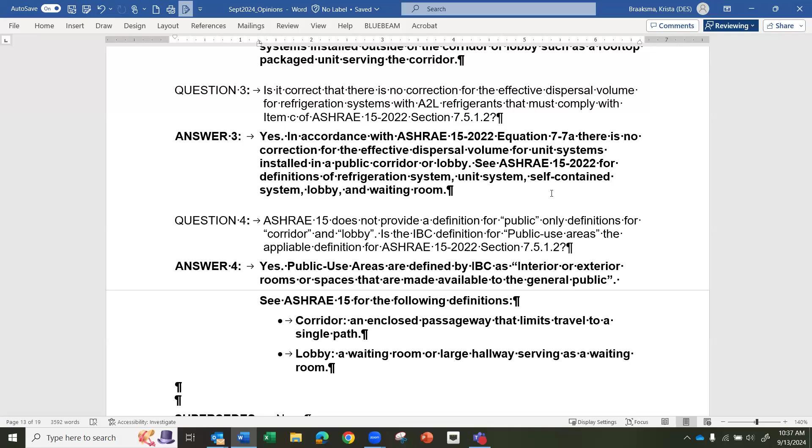Okay, I'd like to entertain a motion to approve this opinion. So moved. Second. It's been moved and seconded. Any discussion? All in favor, signify by saying aye. Aye. Any opposed?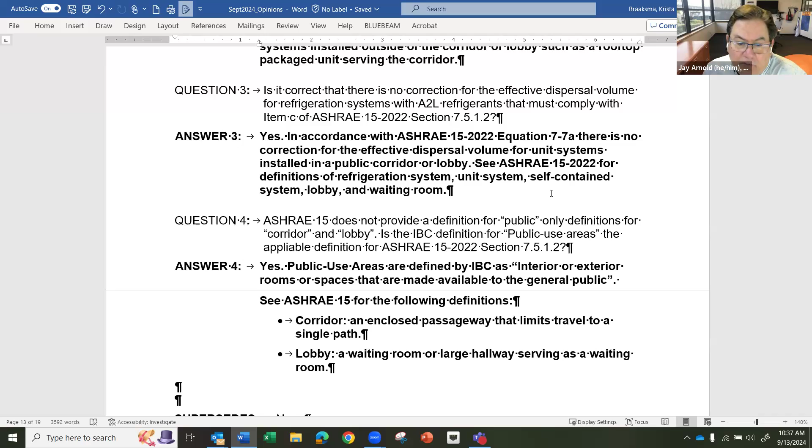Okay, this opinion is approved. We are through the mechanical code opinions. We have 5 or 6 energy code opinions. I wanted to get the view of the committee on whether you would like to take a 10-minute break right now, since we're about halfway through our scheduled meeting time, or if we want to just power through these remaining opinions.

I'm good with continuing, actually, either way. I'm fine with continuing. Okay, let's keep going.

September 11, we're moving into the 2021 Commercial Energy Code, section 403.3.2, HVAC equipment efficiency testing. There are several manufacturers of Monobloc heat pump units, through the wall, air-to-air, unducted heat pumps pursuing AHRI certification. These heat pumps have inverter duty compressors for extended range heat pump heating and capacity control for energy savings. Per manufacturer discussions with AHRI and other testing agencies, these units do not directly fall under the scope of AHRI 310-380 for PTHP, AHRI 290 for SPVHP, or any other existing test procedure.

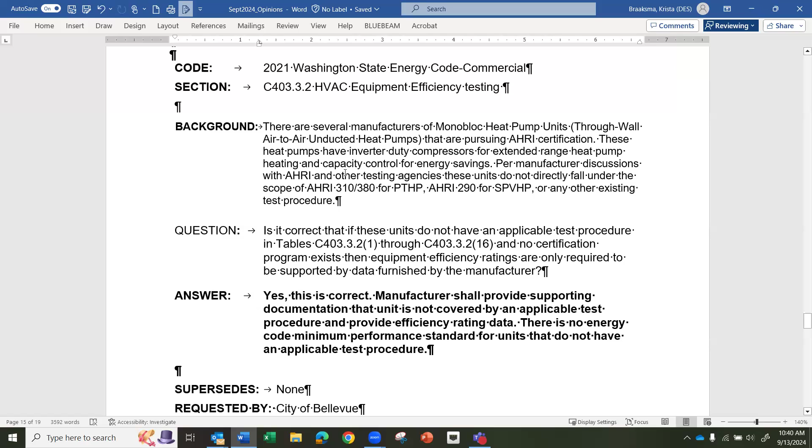Is there any comments or questions on this? Seeing none, I'd like to entertain a motion to approve this opinion. So moved. Second. It's been properly moved and seconded. Any discussion? All in favor signify by saying aye. Aye, aye, aye. Okay, the opinion is approved.

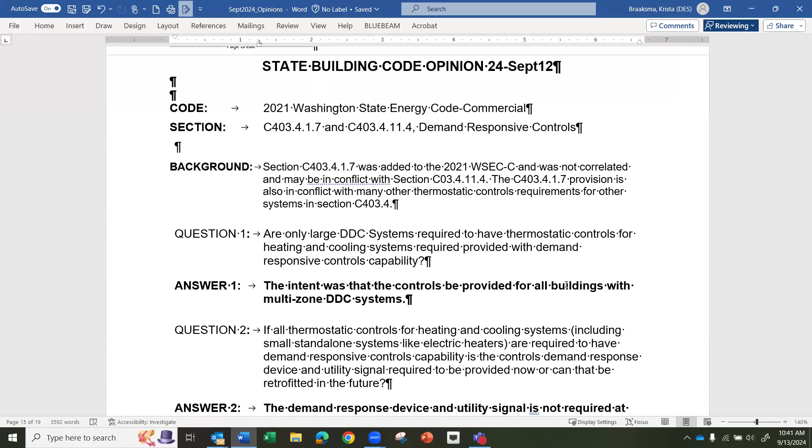September 12. This is Energy Code Section 403.4.1.7, 403.4.11.4, Demand Responsive Controls. Section 403.4.1.7 was added to the 2021 code and was not correlated, may be in conflict with Section C403.4.11.4. The C403.4.1.7 provision is also in conflict with many other thermostatic control requirements for other systems in section 403.4.

The first question: are only large DDC systems required to have thermostatic controls for heating and cooling systems provided with demand responsive controls capability? Proposed answer: the intent was that the controls be provided for all buildings with multi-zone DDC systems.

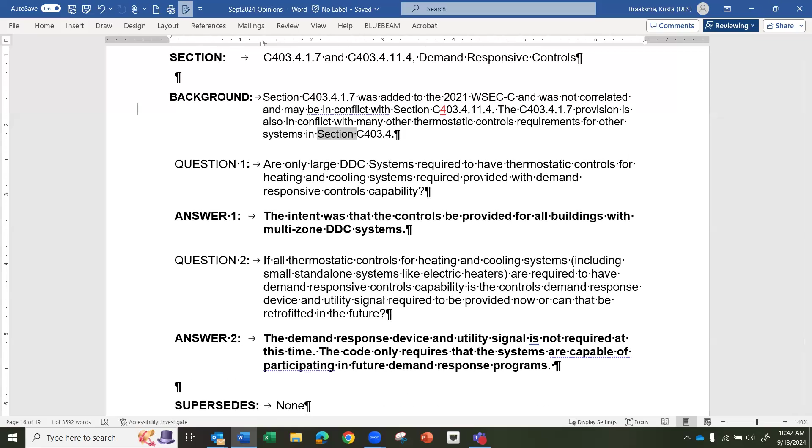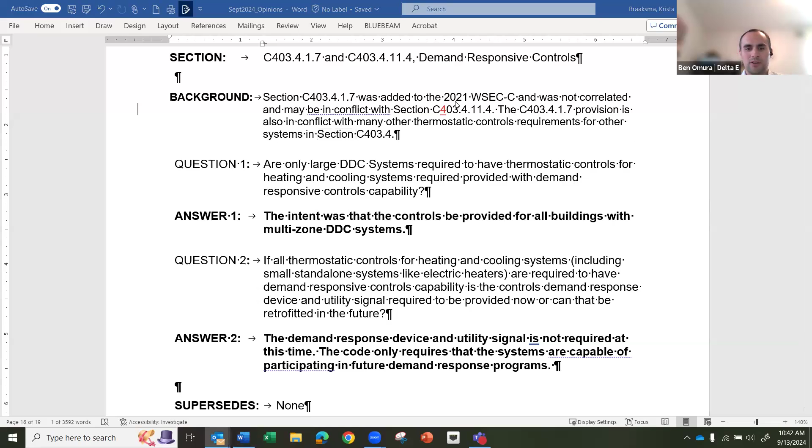Hey Ben, go ahead. Yeah, Chris, I had sent you a rewording of this based on my understanding. My recommendation was to state that the intent was that thermostatic controls at the zone level controlled from a DDC system shall be provided with demand responsive capabilities. That's kind of the way I was thinking of it. Does that align with the staff understanding of what this section is requiring?

Yes. Okay, and in plain language, this is requiring that control systems that are part of a DDC control system shall be provided with this capability to have demand response operation in it, and wouldn't be required for systems that have localized control or systems that are intended for process applications like stairwell heaters or other things that it would negatively affect the system operation and the intent of that controls.

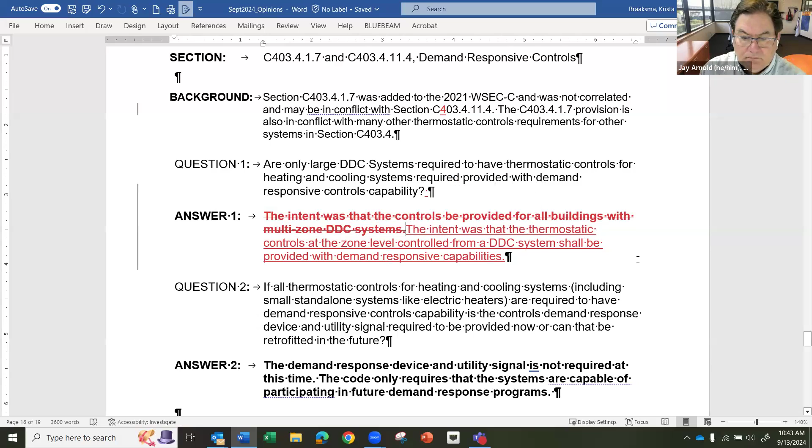Eric, go ahead. Yeah, so this response would then extend these provisions to any DDC system, whereas in section C403.4.11.4, they would only be required with DDC systems that serve a certain capacity or type of equipment. So it seems like this interpretation definitely makes the code a little bit more stringent, but doesn't extend it to all small systems, and therefore doesn't conflict with a whole bunch of other code provisions. So this clarification is helpful. Thank you. Great, thank you for that explanation.

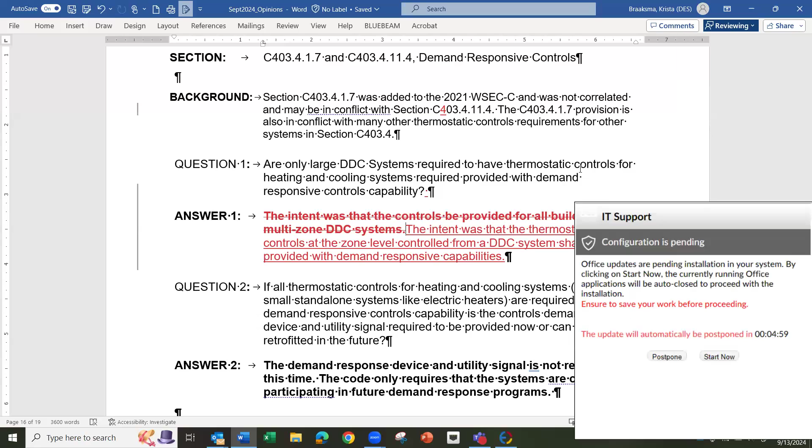Okay, question 2. If all thermostatic controls for heating and cooling systems, including small standalone systems like electric heaters, are required to have demand responsive controls capability, is the controls demand response device and utility signal required to be provided now, or can that be retrofitted in the future? The proposed answer is the demand response device and utility signal is not required at this time. The code only requires that the systems are capable of participating in future demand response programs.

Any comments or questions on this answer? Seeing none, I'd like to entertain a motion to approve this opinion as revised. So moved. Second. Been properly moved and seconded. Is there any discussion? All in favor signify by saying aye. Aye, aye. The opinion is approved. Next.

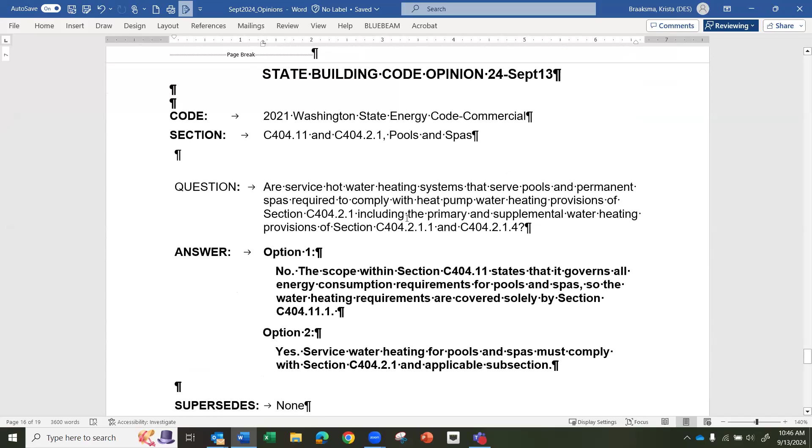September 13th. Also on the energy code, C404.11 and 404.2.1 regarding pools and spas. Are service hot water heating systems that serve pools and permanent spas required to comply with heat pump water heating provisions of section C404.2.1, including the primary and supplemental water heating provisions of section C404.2.1.1 and C404.2.1.4?

The proposed answer, the first option which was staff's preferred option, was no. The scope within section C404.11 states that it governs all energy consumption requirements for pools and spas, so the water heating requirements are covered solely by section C404.11.1. The alternate answer is yes, service water heating for pools and spas must comply with section C404.2.1 and applicable subsections. Okay, any discussion among the two options?

Michelle, was this covered, did you have a comment in your email? I did have a comment on this particular one, just looking for it right now.

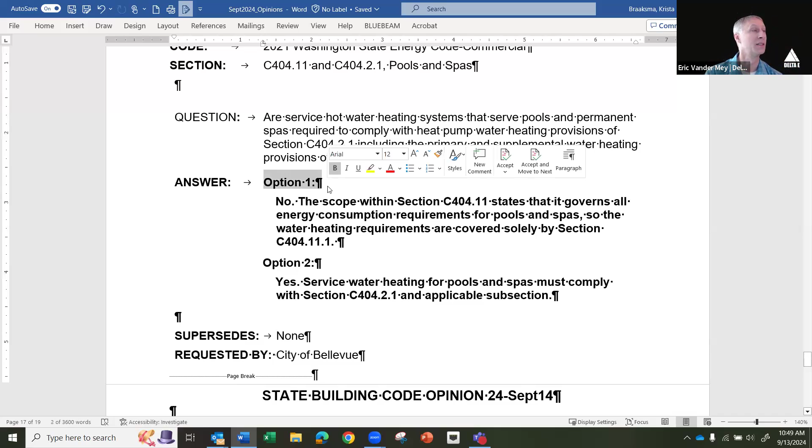Eric, go ahead. Yeah, I agree that the 2021 code could definitely use some clarification in this regard, so this is a good question to pose and answer. Agree with using option - I don't think there was any specific discussions of the heat pump water heater provisions applying specifically to pools as part of the adoption process. So this is a conservative interpretation here, and it's probably warranted. As Michelle mentioned, section C404.11.1 does refer to the equipment efficiencies in section C404.2, so there is reference to that section, at least for the equipment efficiencies. I would agree that answering no is definitely the way to go for this code cycle.

Lisa, go ahead. Thank you. Just the context I'd like to lend is having participated in the code language development for the EPCA requirements, with regards to service water heating equipment, the bulk of the discussion was focused on what we would consider standard service water heating equipment. We didn't get into typical domestic water use, and we didn't get into pool use - that is a different scope. So I just wanted to share that was not something I recall we covered when developing some of those updates. Thank you for that background.

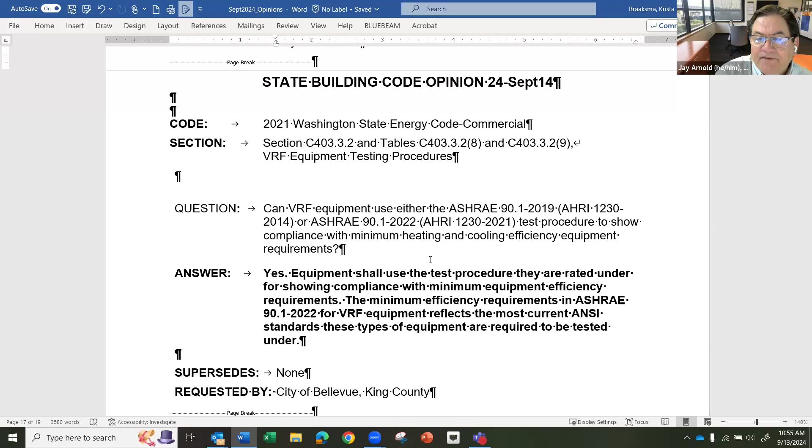I'd like to entertain a motion to approve this opinion. So moved. Second. Okay, it's been properly moved and seconded. All in favor of approving this opinion, signify by saying aye. Aye. Any opposed? The opinion passes.

Final discussion, minimum efficiency. This is kind of part 2 of the last one, and this one comes from King County. This is for warm air furnaces and unit heaters. To demonstrate mechanical equipment efficiency compliance for warm air furnaces and unit heaters, is it acceptable to reference the minimum efficiency requirements in ASHRAE 90.1 2022, Table 6.8.1-5 and Appendix F, Table F-4 as an alternative to the minimum efficiency requirements in the 2021 WSEC Table C403.3.2(5)? The proposed answer is yes, the minimum efficiency requirements in ASHRAE 90.1 2022 for warm air furnaces and unit heaters reflects the most current ANSI testing standards and are equivalent in terms of average energy efficiency to the referenced table currently in the 2021 Washington State Energy Code and can be used to demonstrate compliance.

Thank you. Are there any questions or comments on this opinion? Lisa, go ahead.

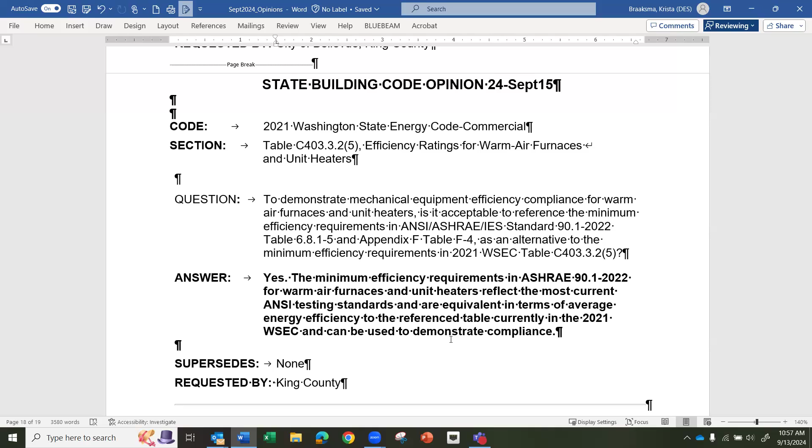Any further discussion? I'd like to entertain a motion to approve this opinion. So moved. Second. It's been properly moved and seconded. All in favor of approving opinion 24 September 15, signify by saying aye. Aye. Any opposed? The opinion is approved. Krista, I show we are through the set of requests for opinions. Did I miss anything?

There is one more that got lost in the flurry of proposals this month that we will be bringing to the meeting in October, but I don't have anything prepared on that one yet. Okay, very good. Thank you.

Patrick, go ahead, I have a question. Did you cover the water heater installation for the residential energy code interpretation that's on the agenda? Yes, it was the first one. Oh. And it was, Patrick, it was approved as drafted.